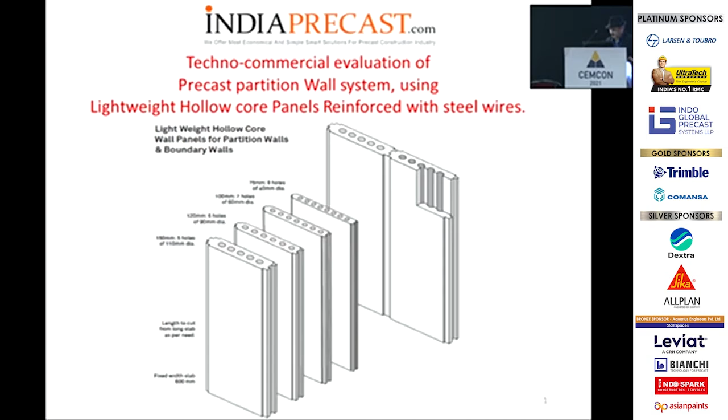These wall panels are going to be hollow core wall panels, and they have been reinforced with wire. So it is not pre-stressed to that level, but there is reinforcement with wire. So this is a lightweight hollow core wall panel. When we say lightweight, there are two types of things we can do. One is we can do it with leca, but leca is very costly. So in India or in most places, they are doing lightweight only by the hollow cores in the panel. That is how it has been manufactured. Worldwide these days, people are using these hollow core wall panels.

Secondly, this is just a non-structural wall panel. It is not a load-bearing wall panel. So up to a certain limit you can put a load, but not beyond that. This is mainly used for low-cost housing, affordable housing, and even row houses. Plus, when you are doing the construction of your building, in parallel you can start production of the wall panels at the factory, and once one floor is over, you can go on loading the panels for the partitions of that floor.

This plant we are using is a semi-automatic one, which can even be installed at the production site if the quantity is good enough, so that you can save on a lot of other things. And we extrude the wall panel on the concrete road, so on the same road you have made for the society or the whole project, if the level is maintained well, you can extrude the panels and use them right there. So I would say the plant is also a type of mobile one.

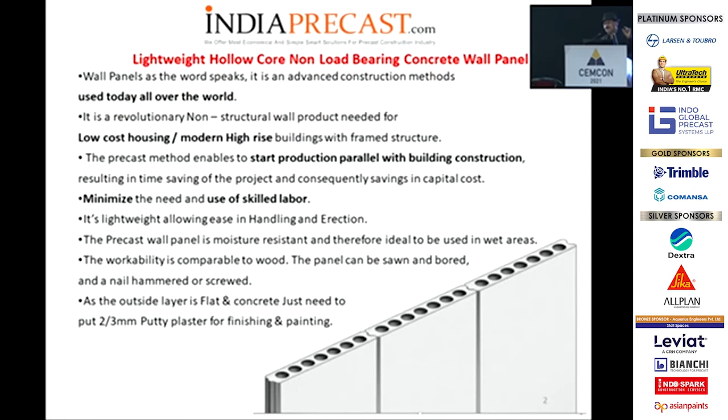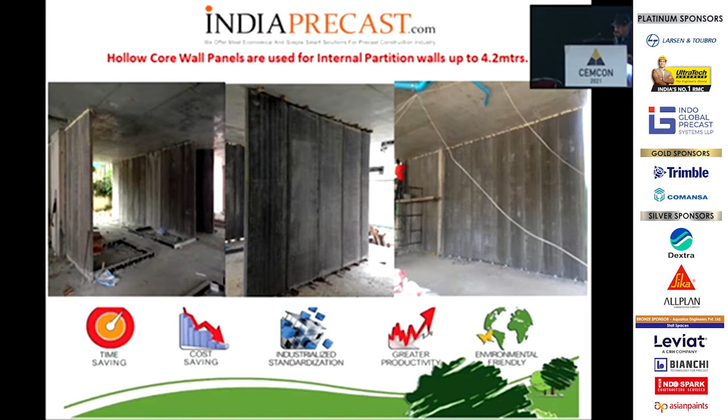When we are extruding this panel, if the concrete floor is very well leveled and you get proper panel quality, then only 2 to 3 mm wall putty is required to finish the panel before painting. This is the partition wall you can construct with these panels. There are tongue and groove joints which interlock the panels, and between the tongue and groove we put the grout. We have another step in it, which I'll explain further. Basically, these panels replace AAC, CLC, hollow blocks, bricks and others.

As far as the load of the panel is concerned compared to the AAC block, individually the AAC block may be lighter, but comparing AAC with 15 mm gypsum on both sides, you will see this panel is at the same weight level as AAC.

Because people have got the notion that AAC is lighter and our structure and everything is designed according to AAC, so we will not be able to use this wall panel. But it is not so. I would say when you consider it completely, then you come to know where it stands.

So we also have introduced in this wall panel 3 mm wires, 4 to 8 numbers of wire in the wall panel. With the help of this wire, the advantage is when you are transporting it or handling it, or if there is an earthquake or anything, this wire will hold the concrete into position. So that is another advantage. Though we call it reinforced, we do pre-stressing, but not to the level other pre-stressings are done.

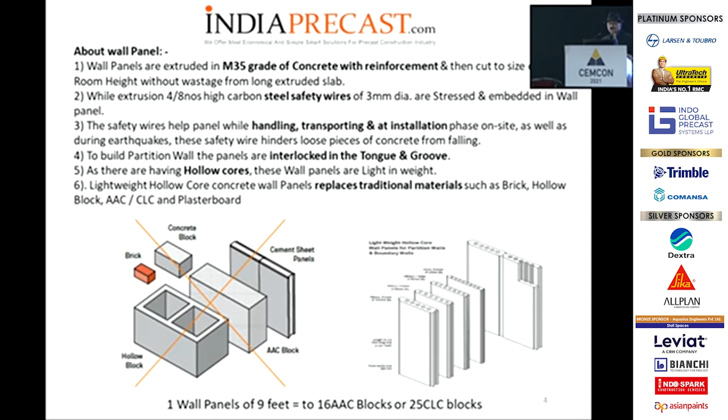As I told you, the interlocking is done by tongue and groove, and because of these hollow cores, it has become light in weight. This is the typical arrangement where we have got a step in the panel at both ends, of about 5 mm by 25 mm. When we are locking this into a tongue and groove, we already put a grout between the tongue and groove. After that, once the wall is built and dry, we put the wire mesh between the two grooves and then we put the grout.

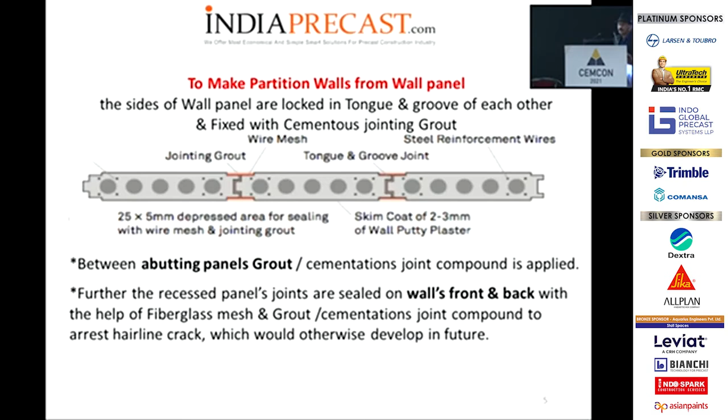This helps to further prevent the hairline crack that people feel may come in due course of time. So there is another advantage we are taking by extruding in a semi-automatic plant: we are getting the step grooves on both sides of the panel. Both sides you seal with wire mesh and grout, which will help us to make a proper homogeneous structure.

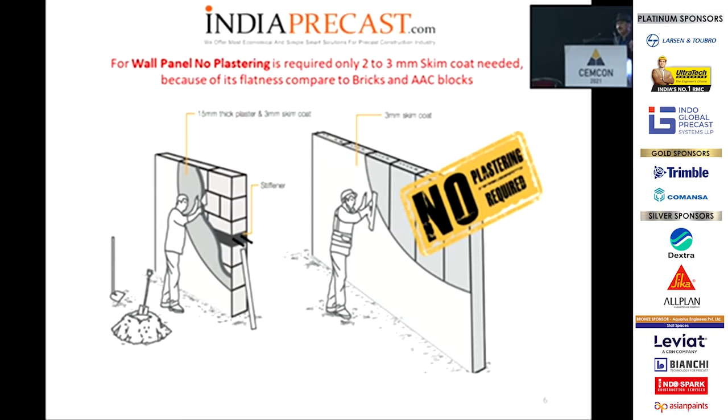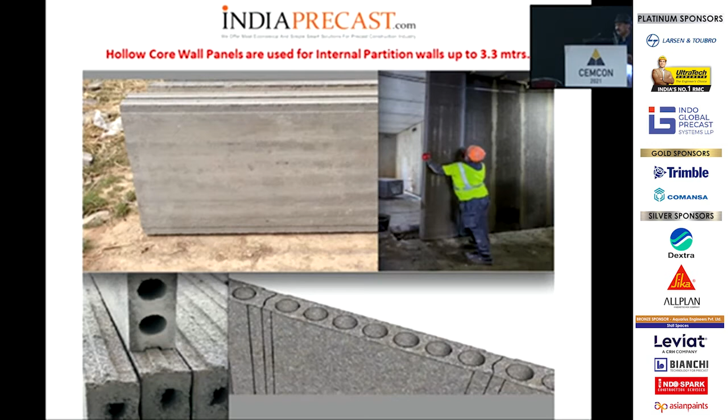Because the level or flatness of the panel is very good, only a 2 to 3 mm skim coat of wall putty is required. There is no need of any gypsum POP or anything. So we save a lot of cost and time on the plaster. Here I wanted to show the step in the panel we are achieving at both ends of the panel, and the tongue and groove in which the panels are locked to each other while installing.

Another advantage is because it's an M35 grade concrete panel, you can use tile or marble or granite directly on the panel. There is no need of doing any plastering on the wall panel before you want to place the tiles. Just a 2 to 3 mm skim coat is enough for finishing the panel.

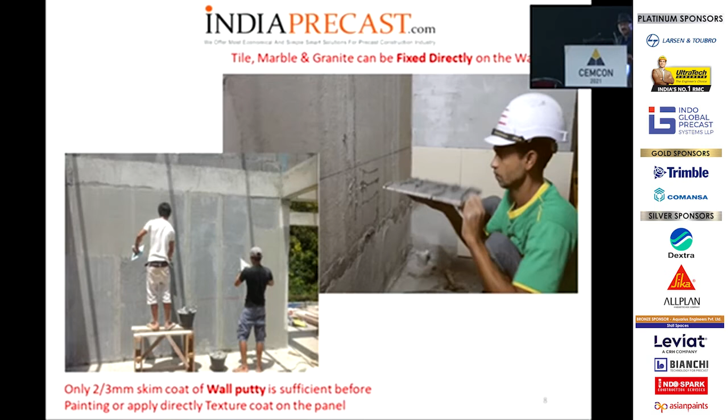Usually there are different sizes of wall panel. They come in 75 mm, 100 mm, 120 mm, 150 mm. But because our machine is semi-automatic, we can also make the design according to your thickness or the municipal requirement of that area, say a thickness of 140 or 160. We can design the machine accordingly and manufacture any other size also. But for that we require 2 months to manufacture the machine and 1 month to import it.

Here what I want to show is when the height in a commercial building is beyond 3.3 meters, we can put one panel on another, either directly or with a staggered pitch. For 75 mm thickness, the panel can be about 3 meters. But at about 120 mm thickness, we can go up to 4.2 meters height. Anything above that, we can add another 1 meter, 1.5 meter or so. And if required, we can put steel girders in between also.

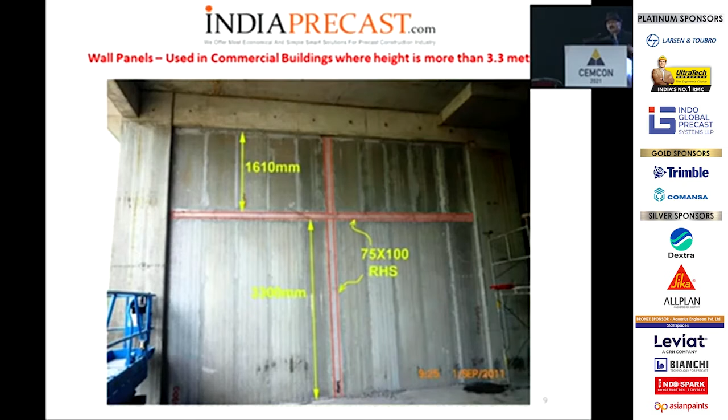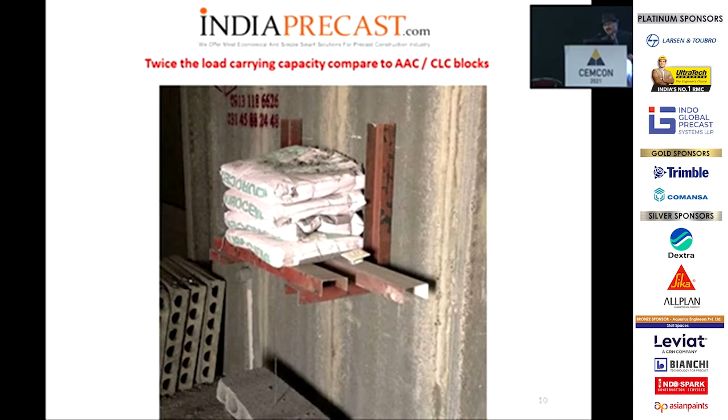After every 5 to 6 panels, if you want, we can put a steel girder if there is vibration or load coming on the panels or the structure. It can take about 300 to 800 kgs of load depending upon the thickness of the panel used. Compared to AAC block, being M35 grade concrete, this panel is very strong for the purpose. And the speed of installation is very high compared to brick and AAC block.

Say for example, if you are doing a 14-story building and there are about 112 flats in it, so if you require say about 10,000 square meters of wall, then if you do it with brick, it will take about 100 days. And if you do it with the AAC block, it may take 40 days. But with the wall panel, we can just finish it within 20 days. So that is the advantage.

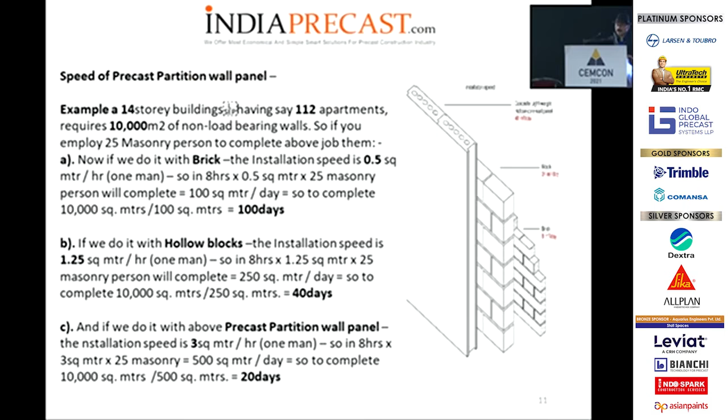Plus, these panels are dry panels. So at site when you install it, you can do the skim coat and immediately start doing the painting and all that. So that is again another advantage of it.

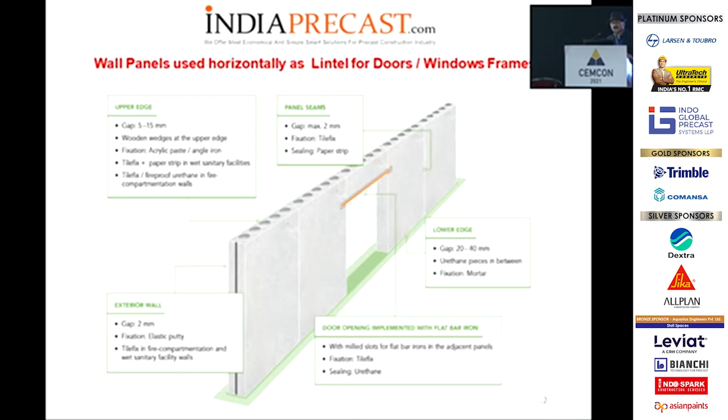Here what we want to say is, when the panel is turned horizontally, we can also use it for developing lintels or door frames with the same panel. So you have to cut the panel accordingly and tilt it to the horizontal requirement. So doors, windows, all that can be done with the same panel in the same thickness, and there is no need of any lintel and other things.

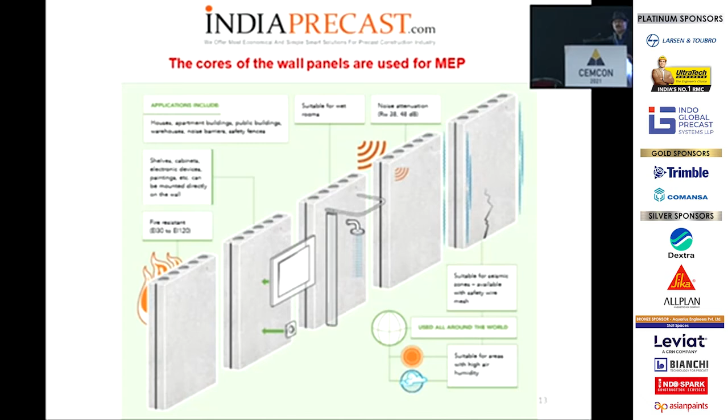Okay, this being hollow, we can introduce all the MEP into the hollow cores of the wall panel. So be it an electrical thing or big plumbing, all that can be done in it. And we can also get very good Wi-Fi because of this hollowness. So if the Wi-Fi system is installed in the office, with the hollow panel you can get very good Wi-Fi also, which is one of the requirements these days.

Okay, so the international standard for these wall panels is 600 width. The width is throughout, whatever the thickness, the width will remain 600 only. And thickness can vary from, as I told you, 75, even 90 sometimes is available, 100, 120, 140, 150. But most commonly used is 75 thickness, and second is 100 thickness.

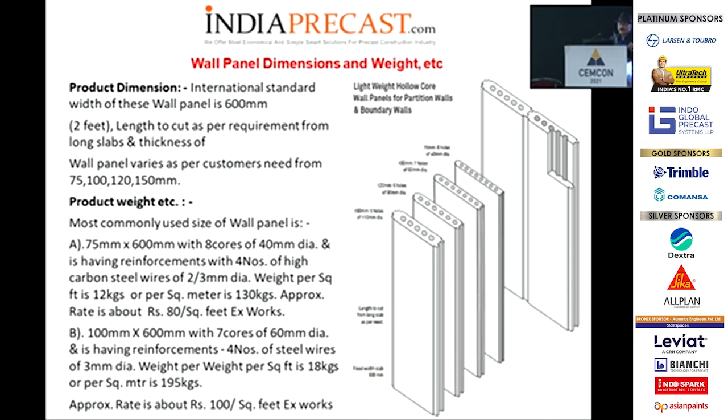Okay, these are the cross sections of the various thicknesses of the wall panel. So there is about 35 to 40% void in it. So it is lighter by that much weight comparatively. So if the density we are using is 2,400 kg per cubic meter, ultimately we will get about 1,800 or so density at the later level. So there are four sizes we are showing, the core and all that. Most of these things are available on our website also. But we will be sharing the PPT with ICI, and they will be giving it to all the delegates and the participants.

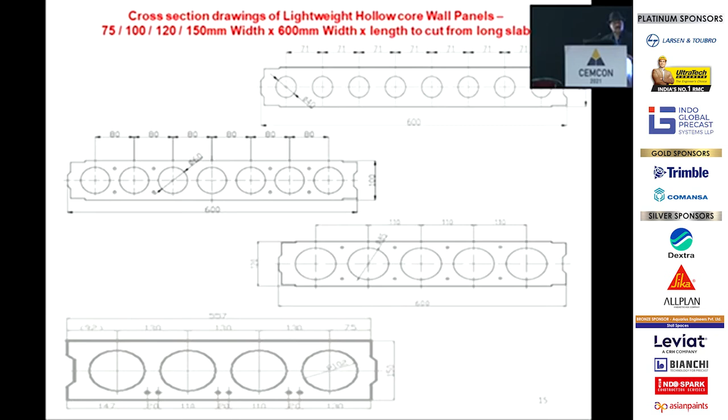Okay, here we are comparing our wall panel with concrete block, AAC block, and other bricks and panel boards available in the market, that is Everest panel board or maybe Aerocon panel boards and other things. So as far as strength is concerned, this wall panel being M35 grade is very high compared to concrete wall, medium compared to the AAC, and brick is high, but the thickness and the weight are very, very high. But these days, I don't think many people are using red bricks in the market.

Okay, moisture resistance, as I told you before, it is very high because of M35 grade of concrete compared to others. Sound insulation, yeah, because of this hollow, the sound insulation is very good compared to other things. AAC also has good sound insulation, but we have still better sound insulation compared to that.

Now fire resistance, average for 75 mm, it is about 60 to 80 minutes. For 120 mm thickness, the fire rating is about 2 hours and more. Regarding installation speed, as I told you, it is twice the AAC block and 5 times the speed compared to the brick and all that.

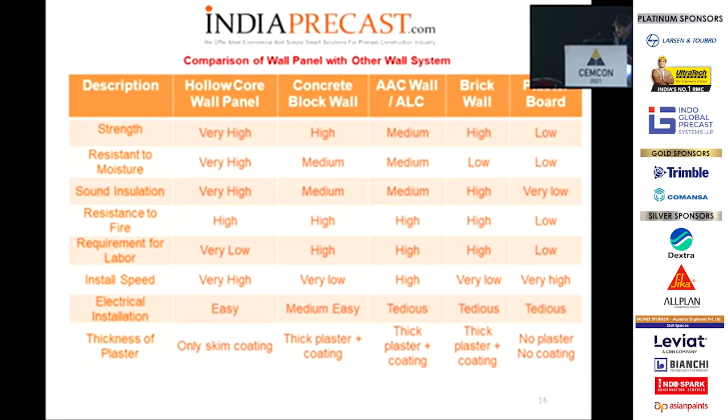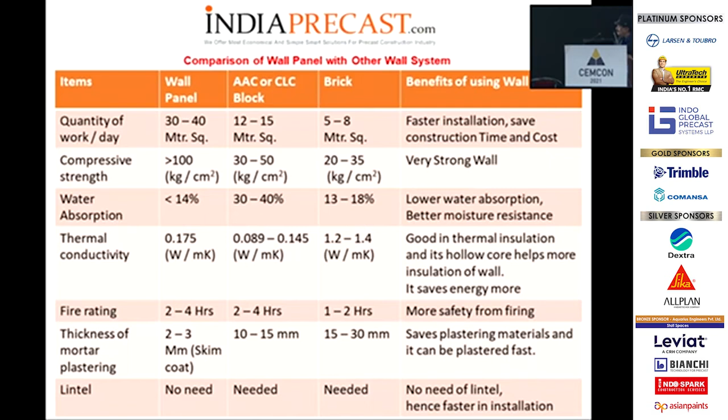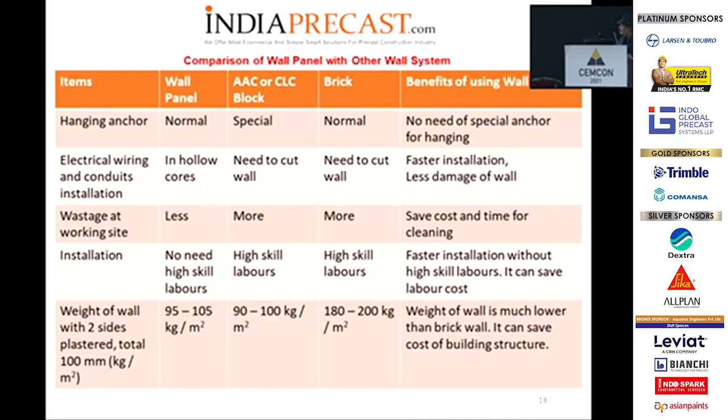Water absorption is very less, so as I told you, it is very ideal for wet areas, especially toilet and kitchen and all that. Thermal conductivity is also very low because of the hollow core in it. Fire rating, thickness of mortar, lintel, I told you. Now, comparison of wall panel with other wall systems: anchors and all that. It is like normal other things. Whatever anchoring you want to do, you can do in this compared to AAC and other things. Electrical wiring, wastage, I told you. So all these are covered. I'm just putting it again and again.

Okay. So here what we say is, considering labor, there is a saving of 80%. Compared to weight, there is a saving of 40% because of voids. As far as the saving in the formwork and all that, we consider it 20%. And speed wise, we consider it 5 times faster compared to bricks, but otherwise it is twice as fast as AAC block installation. Zero cost of plastering we are considering because we are just putting a skim coat on it. Large covered area, because it's one panel when you install. The area covered with one panel compared to small bricks and blocks, which take a lot of time, so this covers area at a very fast speed.

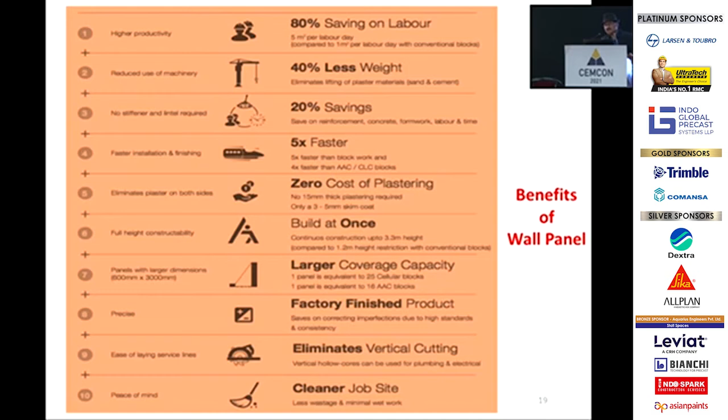Factory finished product, again, is an advantage. It eliminates vertical cutting because of the hollow core, and gives a clean job site, because here you only need to take up some grout to the top of every floor and only the skim coat, that is 2 to 3 mm plastering material. So as I told you the advantages: one, this is a dry wall. Second, door and window frames can be made with the wall panel itself. Then being a thin structure, only 75 mm thickness with 2 mm skim coat, the carpet area of that particular flat increases by more than 6% to 7%. So that is another advantage as compared to the AAC block or brick.

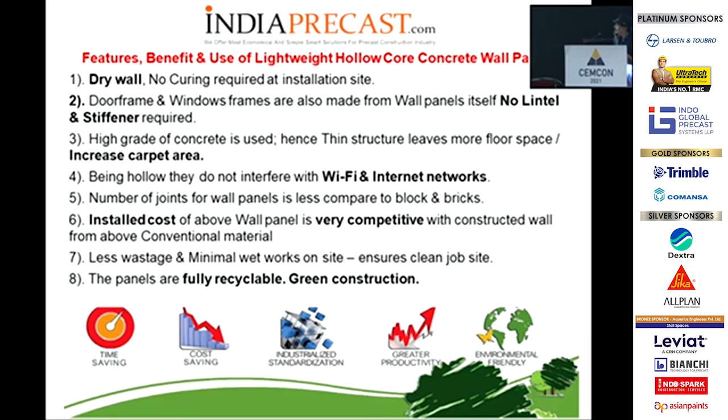The number of joints is also less because of the larger area covered by the panel; only the vertical joints are there. Installed cost: I'll come to it in more detail in the next slide. It is competitive with AAC block, but how much it is, the commercial evaluation, I'm doing at a later stage. And as I told you, clean site, because very minimal material is to be taken to various floors for assembling it. And thirdly, the panels are recyclable, but not in an ordinary way. We can give it to the crusher people, because the structure is good enough that you can grind it, or we are also supplying some grinders if people want to grind it and use it for other requirements. So we call it green construction or green concrete. These are the same benefits I am talking about again: lightweight, strong, saves time, homogeneous, sound insulation, eco-friendly and all that.

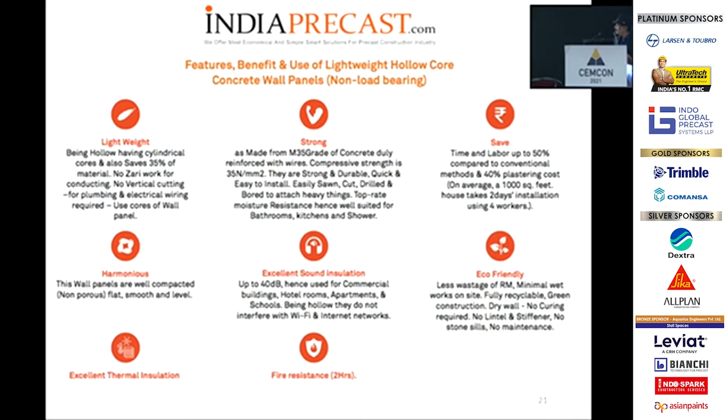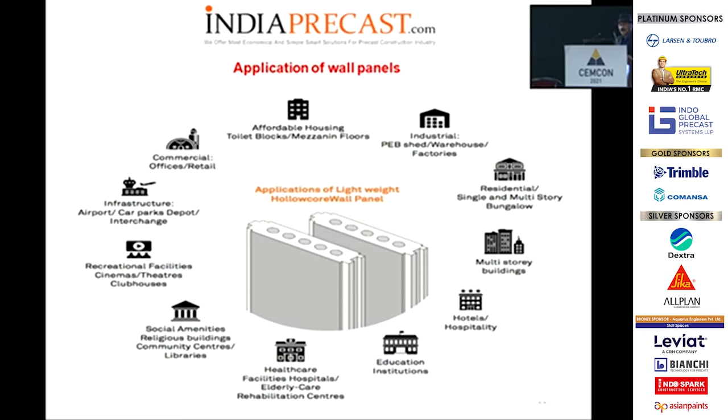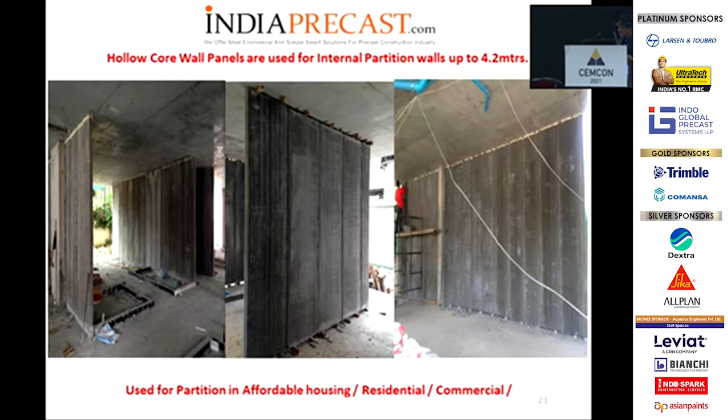So the application of this wall panel: it is used in nearly most structures. It is very good for affordable housing and mass housing, high-rise buildings and other things also. As I told you, it is mainly used for partition walls. It can go up to a height of 4.2 meters in a single piece if the thickness is about 120, and if the height is about 3 meters, then 75 can take it.

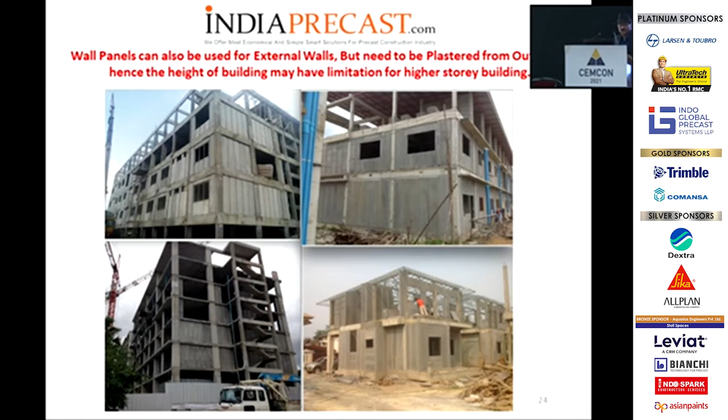Okay, these panels can also be used for the external wall, and the advantage we are getting here compared to brick is that only the external wall needs to be plastered, at least 12 to 15, whatever is the standard required according to the area. Okay. Another advantage: when there is a contour and all that, you can also use the wall panel, being 600, to follow the contour of the building.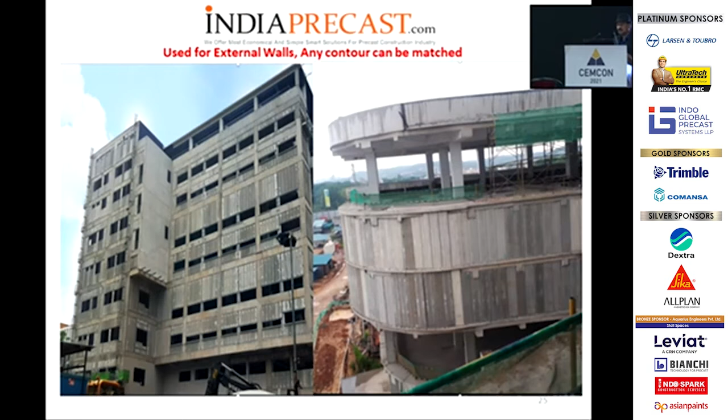Even for the high rise building, you can see. So here we need to have a tower crane, so we can lift the panels at every floor and keep it. So that tower crane is very important for this wall panel. Otherwise, up to 4 story, you can handle it with hydra and all that. But above that, we need a tower crane. So we have to make sure that tower crane is there in the project. Then only you can supply the panel.

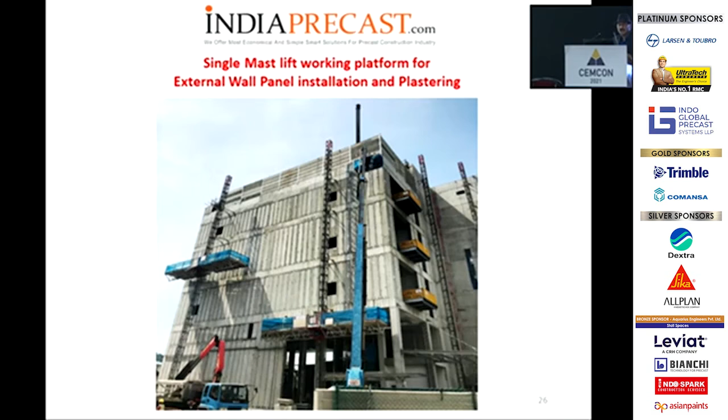We can also use the mast lift working platform or gondola for plastering the external surface and other things. Yeah, one more thing I would like to say, if you want to have very good sound insulation, we can use a sandwich panel also, 2 panels at the external wall, so that we will not get any leakage or anything, as we are doing in other civil work also. So that is another advantage.

So this is how the external building also sometimes you can finish it. And here you see the panels are used in a staggered pitch so that we don't get fall of the panels when we are installing it one above the other.

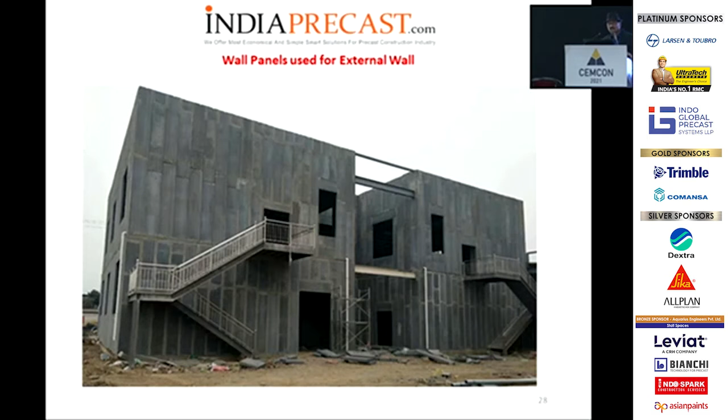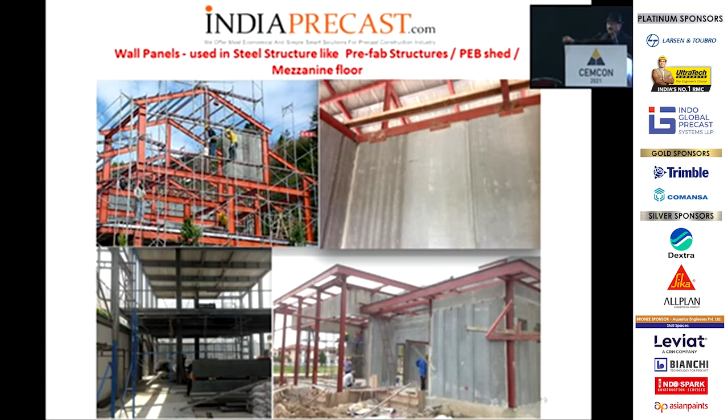So it is also very ideal for using it in a PEB shed or a steel structure where, while installing, the installing cost goes down drastically because we can just do a little bit of welding to the steel and hold the panel. And also we can use this panel for the mezzanine floor, provided sufficient ribs and all that is given below in the structure. This is a showroom made in a steel structure using the panel.

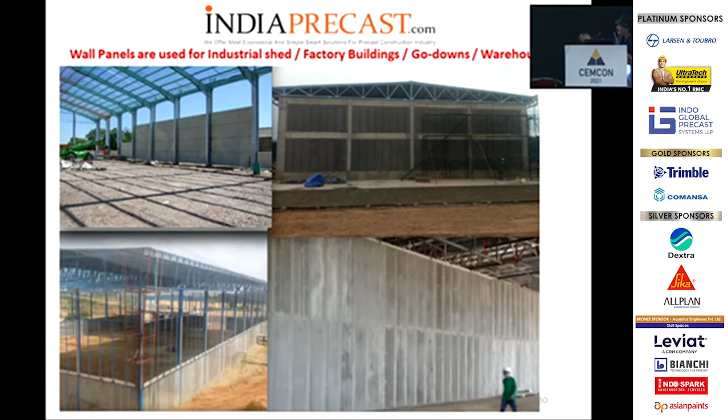Again, very good advantage for making warehousing and all that, or for industrial factories, because here you are also getting sound insulation, being hollow in structure. So good for warehousing, PEB shed, or any industrial factory and other things. So this is again for the warehousing, one of this we have shown.

Okay, here you can see the V notches at the top and the bottom. To hold this, we have got a starter bar, and then we fill it with the concrete. So apart from tongue and groove, the panels will be holding in that. I'll explain more on the installation side.

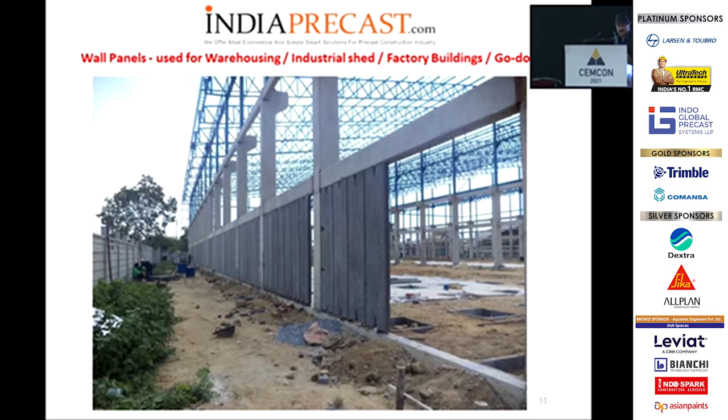So, another good advantage is for the boundary walls. This wall panel was considered for the Nagpur Mumbai expressway. Initially, the design was that only, but all the 14 people who were bidders and who took the order were not well versed with this thing. So then it was changed to a solid one. But using this panel, they will not have to put sound barriers at certain places where otherwise they have to put sound barriers. And being light, it is easy to handle and do the work there.

So these days, for a railway project, the high speed bullet train project, they are again considering this wall panel. So very good for boundary wall, and you can also install it vertically. The advantage is nobody can climb and cross the boundary.

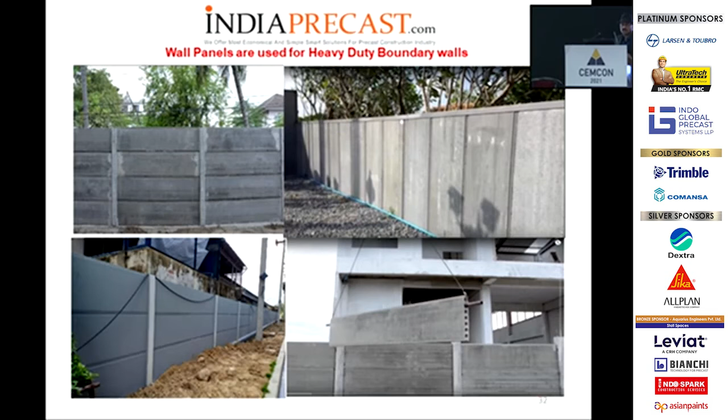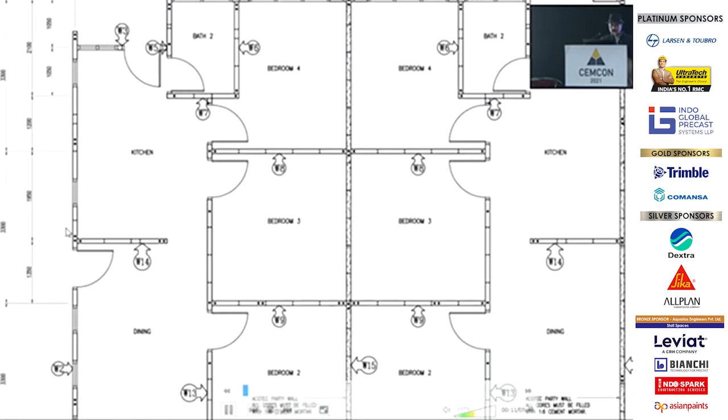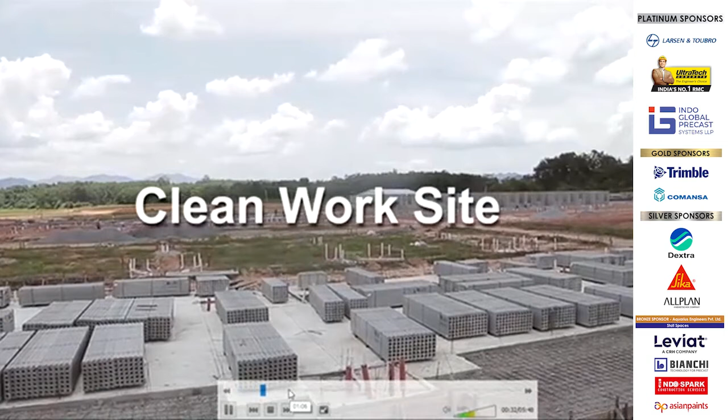Acotech Sdn Bhd, a member of the OSK Group. In line with Acotech's vision to create a greener and more sustainable construction methodology, the AcoBuilt, a sole proprietary building system that has been specifically designed for the construction of single-story houses. With the AcoBuilt system, conventional RC columns are not required, lesser formwork and in-situ concrete casting. Hence, manpower is greatly reduced and productivity is significantly increased with fast-speed Acotech installation.

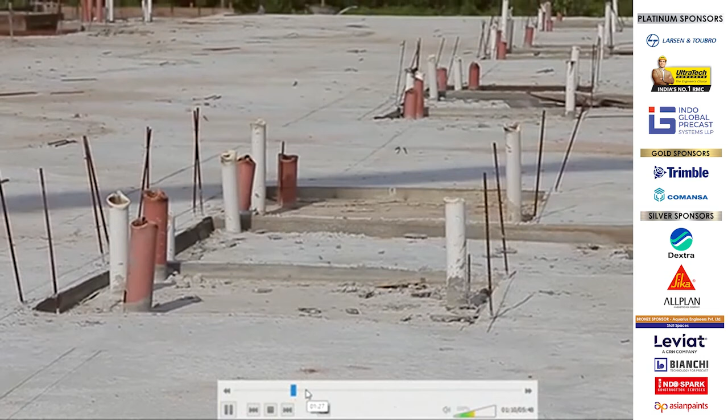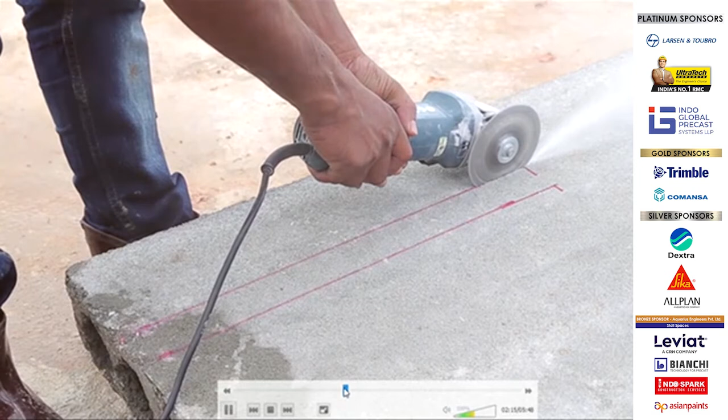The AcoFix will ensure a strong bonding between the Acotech panels and the RC slab. Erect the panel in a smooth and uninterrupted manner. While the erected panel is held in place, adjustments should be made to align it to the marked lines.

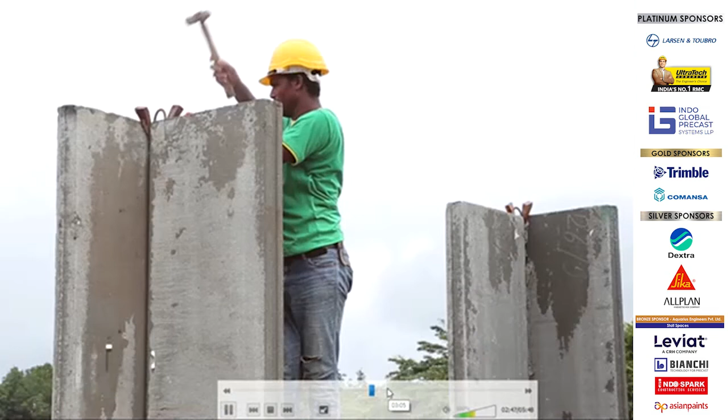The erected panels must be temporarily secured in position with wooden wedges, while the verticality of the panels must be checked, where the joints are fully filled.

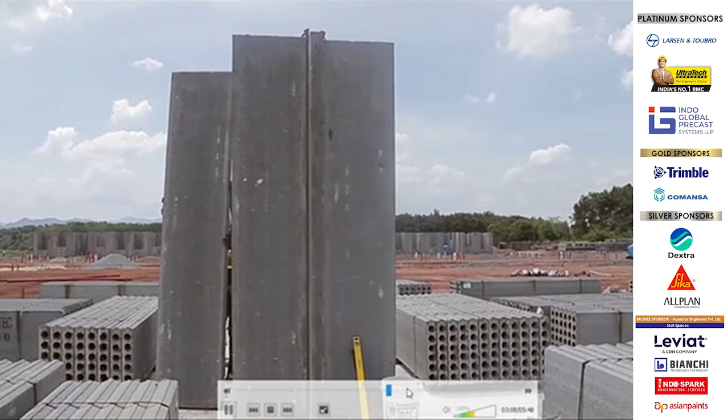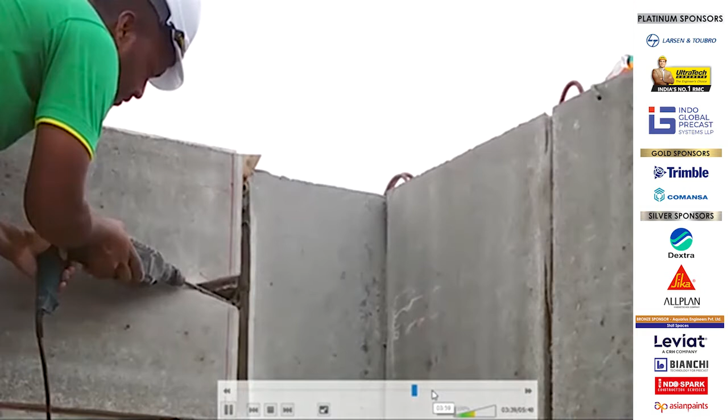Similar to the first panels, Acotech panels are used for door lintels. Simply cut out recesses of the adjacent panel for the AcoBuilt door lintel to rest on. It is simple and neat, done with a concrete cutter. By using the hollow cores of the Acotech wall panels, less cutting and patchback is required from the ceiling and roof truss.

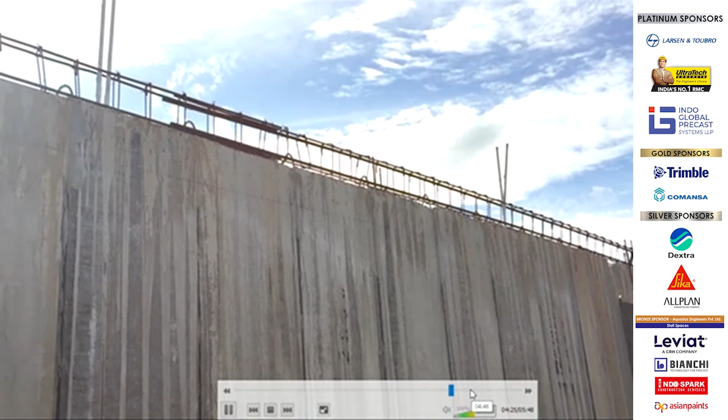Lastly, a capping beam is cast on top of the erected panels with minimal formwork and reinforcement linkage to form a solid and stable wall. Fiber netting is recommended to lay at the joints.

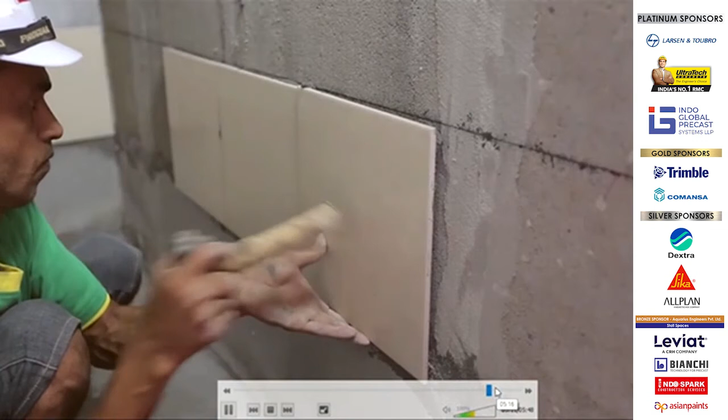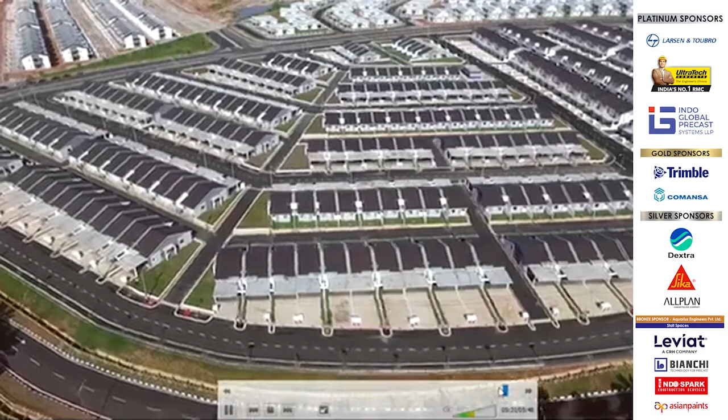This work involves less wastage, cleaner site conditions, and is also suitable for receiving direct tiling on the panel surface. It is the perfect... Acotech, creating the ideal future.

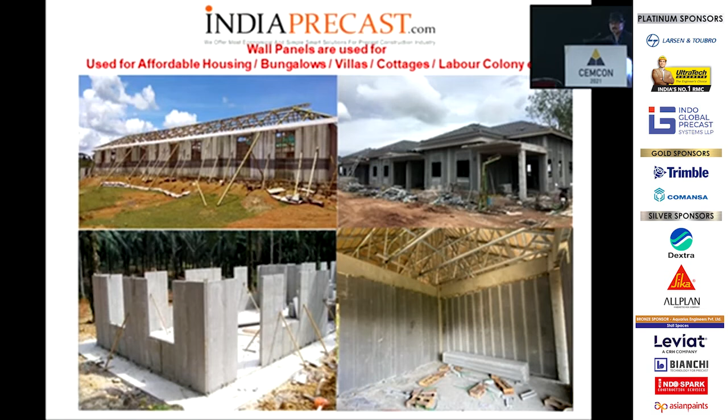Start today. So here we are showing that it is very good for row houses and other things, for bungalows, row houses and other things.

Here we are using it even for chemical factories where the height is very good, say about 15 to 20 meters. So this wall panel can be taken up by a lifting system and you can install it where you cannot do certain brickwork and other things.

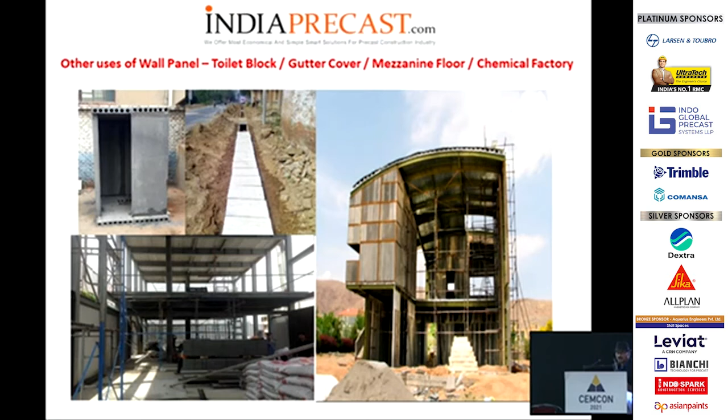Other uses include for toilet blocks, gutters, trenches and all these things.

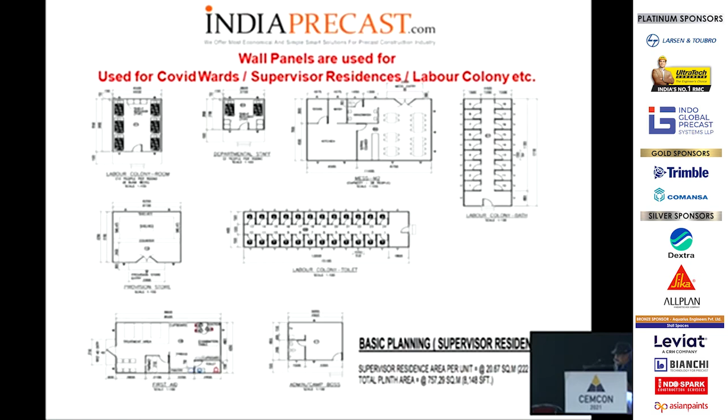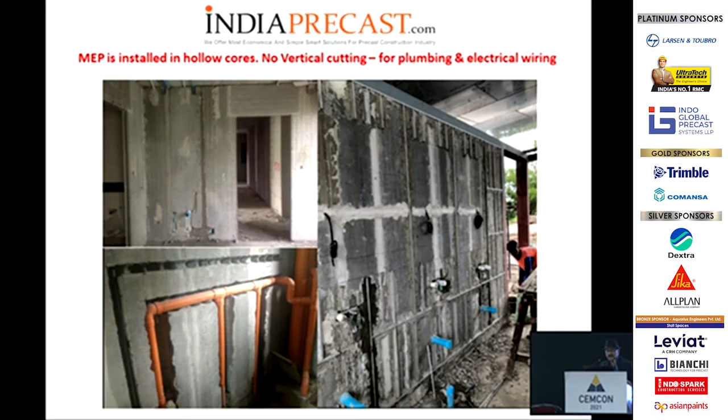So it will be strong enough for holding in the partition. This is what I was trying to show you, that for electrical application, when you want to put an electrical box into it, you only have to make sure that the back wall is not cut out completely.

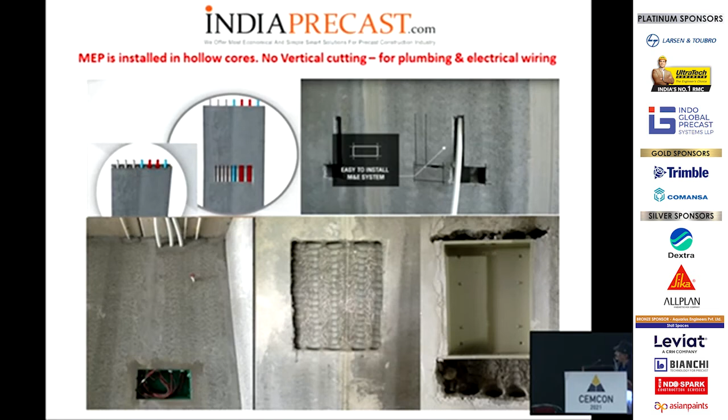If the load is good, then you can just do this and install the electrical equipment also. So these are the installation equipment used for installing the wall panel.

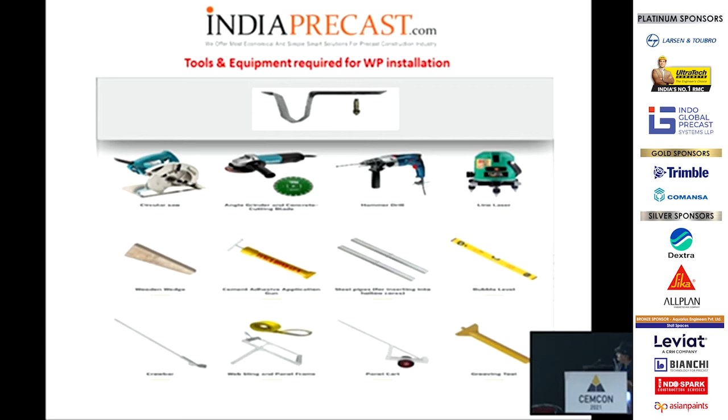So if you can lift it manually, if not, then the hydraulic wagon is supplied by us to do that.

So here we are just showing how it is locked, and there is a steel element in a U shape, which is put into the core, and then that is anchored to the ceiling or floor. So that will hold the panel.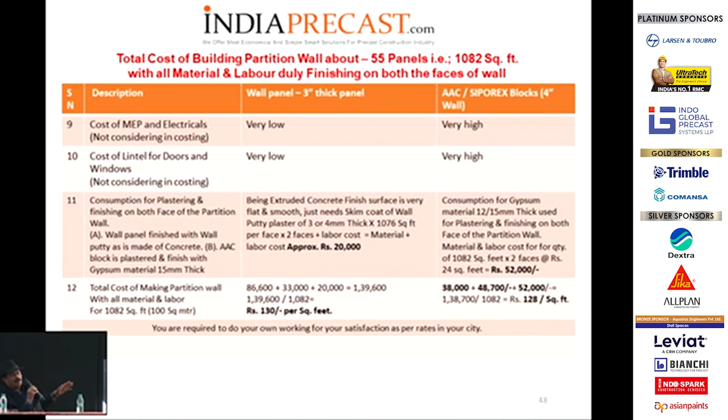If you have to make it in AAC block, it will be very costly compared to the wall panel. So if you look at it, the advantages are very high as compared to AAC. So though we may be a little costly, the advantage is very high as compared to it.

Yeah, I have one more question. We constructed a building of 2,500 square feet using the Acotech panels. What went wrong there was the mold face was very fine. When we erected this, those were proper in line, but when it came to the interior one, we ended up doing the plastering on the inside to get the alignment.

See, it depends upon the installer. Most of the time, the builders and developers want to save their cost, so they don't want to hire professional installers and all that.

We have supplied to the manufacturer, and the same Acotech panel may be supplied by them for Elematic. I agree it may not work for some walls, but it cannot be a general case because world over, people are using only these types of wall panels, not AAC and others comparatively. If this was a complaint, it would not have been used in the market. We have bagged the order of 25 lakh square feet partition wall to be done for Billimoria.

One final question: we fixed the interior somewhere around 2 years back. What is happening now is that because of the weight, the panels are not taking the load, and the cabinets are coming down slowly. But this is on the architect panels only, not our Ecotech panel.

Now, while installing, what happens if your weight is very high? What we do is fill the core where we know the furniture and load will be heavy. So we fill the full core with concrete, and then install the anchorage and fittings. If we know certain places will have very high weight, we fill that fully, and it is not a big additional cost comparatively.

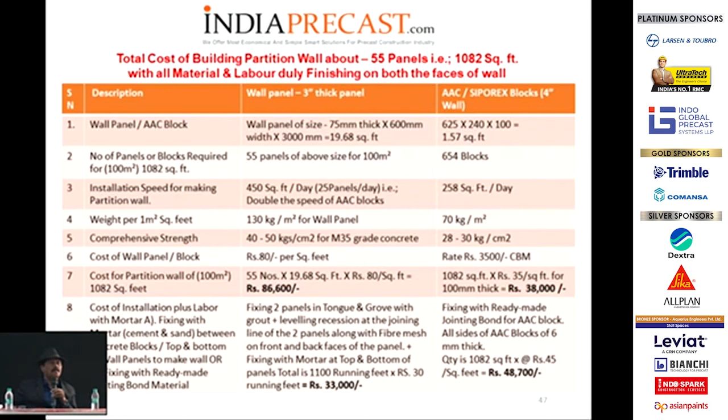There is every possibility of a separation crack forming between different structures, meaning at the bottom or side of the column and your wall panel. So how do you solve that problem?

Actually we use starter bars and other iron pieces. When we first install the panel on the column, we put small steel rods — three rods are put in, and as I told you, there is a V notch there. The three rods and the panel are again packed with concrete. From the column to the wall, we also put wire mesh and grout. The step is very important, and that's why our panel is given with steps on both sides, to arrest these types of hairline cracks which come afterwards. That is the difference.

Because of that step, when you put the grout, the amount of skim coat required is much less. If the step was not there, you would have to cover it up to that step plus additional skim coat — that's the difference. And on both faces we are putting wire mesh, not only one face.

Thank you, yes, it seems to be a good product actually. What is holding back the promotion of this product in the market? I think the cost comparison is coming to be more or less the same. The speed of construction, finishing — everything looks positive. So, according to you, what is holding this back?

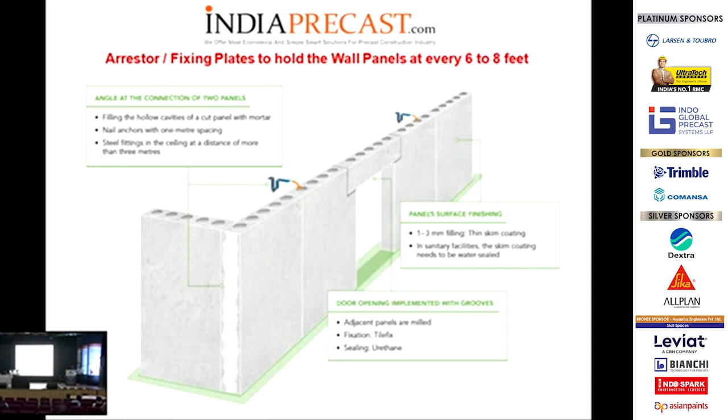When there is load bearing, certain times what you can do after extruding it is take the hollow core and fill it with concrete and then use it. In that hollow core, you put some rod and concrete and make it load bearing and use it. You got it? That is a jugaad way.

Actually, this is very good for rural housing. In rural areas, it is still very time consuming, and if it is economical over the traditional load bearing way, it is a very good option for rural housing. So basically, as I suggested, in the rural case you can even put a bamboo inside and put concrete. This is a jugaad I'm telling you, fill it with concrete. That will become a little bit more load bearing, I would say.

Good morning, sir. My question is regarding the electrical and plumbing lines which go through this wall. Most of this wall, as shown in this picture, is hollow cores. And what we typically see in the electrical designs is that most of the concealed wiring is coming exactly on each of the other face, so they are not staggered. So being a hollow core, if we do a cutout or the casing there, will it go through and through, because the thickness is less and the junction boxes are typically exactly on the other faces of the wall in the same location?

No, even if you puncture, if the junction box is a little smaller in size, if you puncture both sides and fill it with concrete very well, then it can work. There is no issue. Now, if you install the whole panel and then you want to introduce your wiring or MEP into it, you puncture at the top, put the wire and again fill with concrete. So anywhere, anytime you feel there is an issue of strength or the panel is going to become weak, fill it with concrete. It is hardly any cost comparatively.